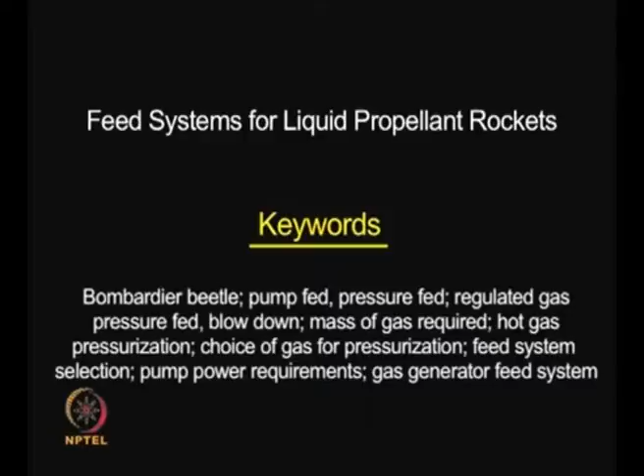Good morning. I think today we will start with this new chapter on liquid propellant rockets.

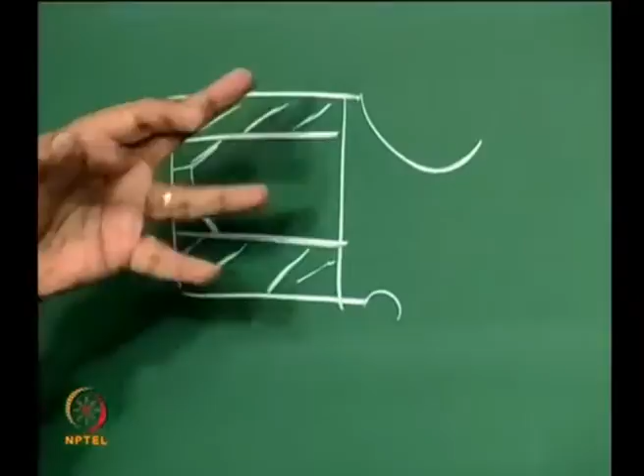When we discuss solid propellant rockets, we told ourselves you have a solid propellant which burns, you have a flame near the surface, and once a solid propellant rocket begins to burn, it is impossible to extinguish it. This is because you have the grain in a case, and once you ignite the grain, there is no way you can quench it, it continues to burn. Of course, there are some works done to see under what conditions you can stop the burning, and by rapid depressurization you can quench it, but these have not reached the stage of application. Therefore, a solid propellant rocket, once it gets started, you cannot control it, it burns and burns, that is about it.

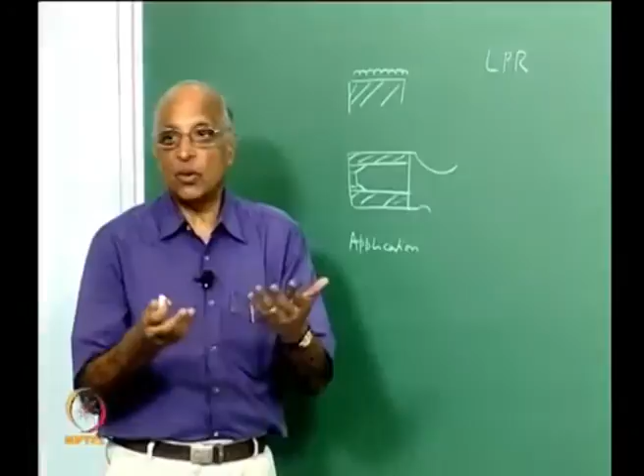Whereas when we talk of a liquid propellant rocket, we have considered different propellants. After all, I inject a propellant into it, I can always control it, and therefore there are certain advantages which a liquid propellant rocket will have.

Let us examine these things, but to get started with liquid propellant rockets, I thought let us go ahead and look at nature. When we considered the theory of rocket propulsion, we talked of a small insect known as the bombardier beetle, you will recall.

What did we tell ourselves at that time? This particular insect is somewhat small, maybe a centimeter to 2 centimeters or so, and it is somewhat heavy, and we find it all the time at all places. It is sort of unwieldy, it cannot fly that rapidly, and therefore it is always attacked by insects, and also it is harmless, it does not bite, it cannot fly much, we just pick it up on a piece of paper and throw it out whenever it comes.

This particular bombardier beetle has had some articles come out on it in the last 10 to 15 years, and one such article came in the Proceedings of the US National Academy of Sciences in 1997, volume 94, running over 5 pages from 1692 to 1697. The beauty of this is we must be familiar with what happens around us.

This bombardier beetle is attacked by ants, and what does an ant do? It stings us, right? And why do you feel a sting? It injects some formic acid into our system. Formic acid is something like carboxylic acid, and that is why you feel a sting, the same sting as when a bee stings us, because something is injected into us. In fact, the ant in Latin is known as formica because it bites us and injects formic acid into us, and this same ant also pesters this beetle by stinging it.

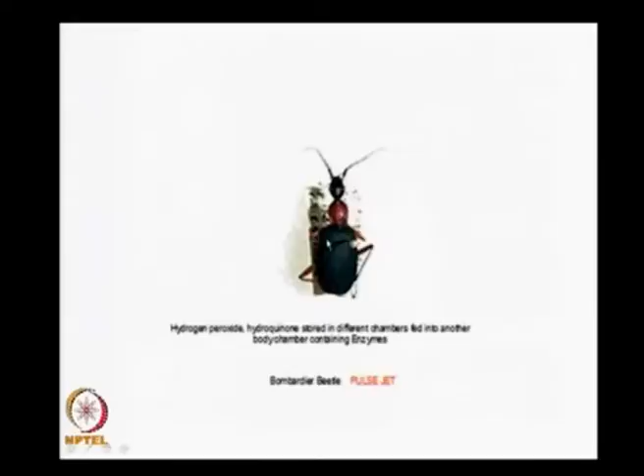It is a very unique way of evolution of species. All the species, if you look at Darwin's theory and all that, have come through some hierarchy, but this particular insect seems to be different from the other species, and it is very illustrative of something which I will now tell you. Let us go ahead and see what really happens: in one stomach you create H2O2, hydrogen peroxide, and in the other chamber you create hydroquinone, which is a fuel.

When it wants to squirt hot gases out, it pushes this hydroquinone, this hydrogen peroxide, into this third chamber which is coated with enzyme, and it chemically reacts to form hot gases which it squirts out.

In the experiments at the National Academy of Sciences, Eisner and others have been doing a number of experiments. They take something like a fork and place it mimicking the ant, and immediately it squirts out the hot gases. They put this intrusion over here mimicking the ant, and it pushes the gas, so it is able to squirt the hot gases in different directions. You put this over here and it squirts out the hot gases in this direction, and so on.

I was reminded of Leonardo da Vinci, the painter who lived in the late 15th century, and he made everything. He looked at birds flying, tried to construct an aeroplane, made bridges. Of course he was a famous painter - you remember the Mona Lisa painting - and in all his life, I think we should remember this: he opened his eyes to the natural world, and he never stopped thinking about why things happened the way they did. So also, maybe if we had seen this insect long back, we would have thought of something like an oxidizer, maybe a fuel injected into a chamber.

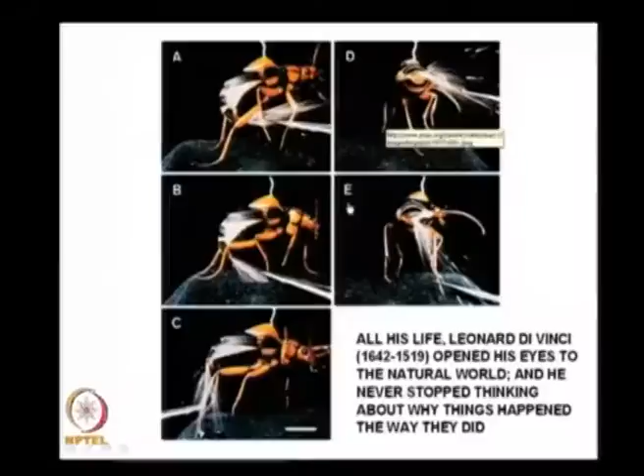Let us go back - this is again about squirting, this beetle. This is the prong or something like this. You are making it squirt out in this direction, maybe making it squirt out the hot gases in this direction, and so on. If you look at what this beetle does: a chamber containing oxidizer, a chamber containing fuel, and a third chamber in which it reacts and forms hot gases and squirts it out.

Well, a liquid propellant rocket consists just of fuel in a tank, an oxidizer in a tank. You pump the fuel and the oxidizer into a chamber - you pump it at high velocities through an injector, break it up into fine droplets, vaporize it, which is all happening in the third chamber, and then you have combustion taking place and you expand through the nozzle. This injector, combustion chamber and nozzle is what creates thrust. It is also known as the thrust chamber, and therefore a liquid propellant rocket consisting of all these gadgets is nothing very much different from the bombardier beetle which is there in nature.

And therefore, I think we should learn to look at nature and understand more about it. Now we come to a large rocket. What does the large rocket consist of? This consists of N2O4 as the oxidizer, and UDMH as the fuel. What is done is, you squirt it out from the tank through a pump, you force the N2O4 into the chamber, you force the UDMH into the chamber, make it burn over here, expand it through the nozzle, and this is what a liquid propellant rocket consists of.

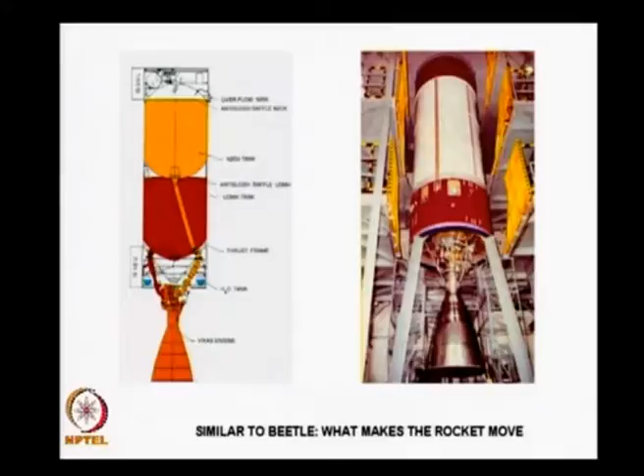The same engine I show here in a slightly larger one in which I carry more propellant. I have the oxidizer over here, I have the fuel over here, I have the pump over here, pushed it, and it generates thrust through the particular nozzle. Let us take one more example: in this particular rocket I just showed you, the oxidizer was N2O4 and the fuel was UDMH.

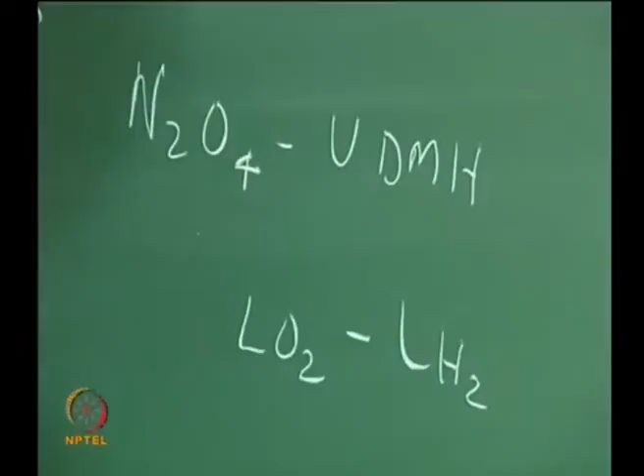We also talked in terms of fuel being liquid hydrogen, the oxidizer being liquid oxygen. When I carry propellants like liquid oxygen and liquid hydrogen, liquid hydrogen is not very dense, so I need a huge tank. I have liquid hydrogen here, liquid oxygen here, and a pump that pushes it into the combustion chamber where it burns. This is what a cryogenic liquid propellant rocket is like.

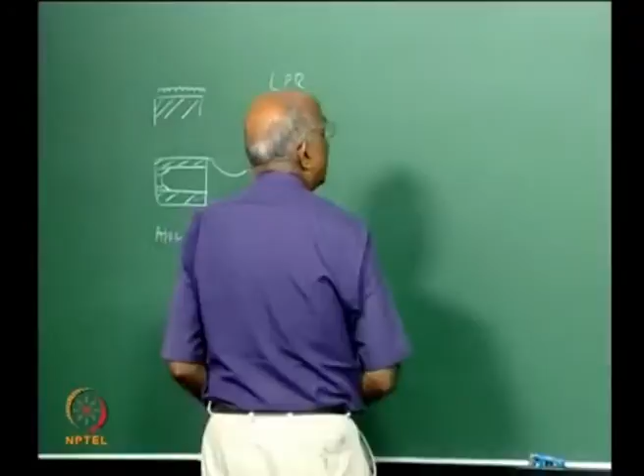What do we infer from these few examples? In case of a liquid propellant rocket, all we need is something like a fuel tank, maybe an oxidizer tank, maybe a pump to take a small value of pressure and increase it - this tells me high pressure, this tells me low pressure, with the incoming pressure small and the outgoing pressure much larger. I push it into a chamber, and I cannot just push it, I have to break it up into particulates.

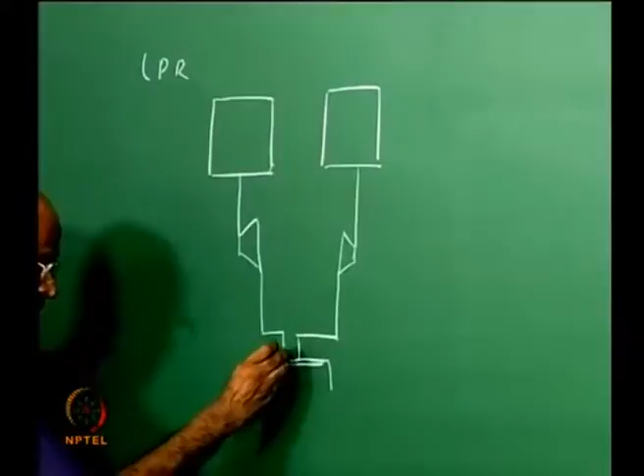That means I have something like an injector which allows the required quantity of propellants to come in, breaks it into droplets, and I have a chamber wherein the reaction takes place, and then this huge nozzle wherein I expand the gases. This becomes the liquid propellant rocket.

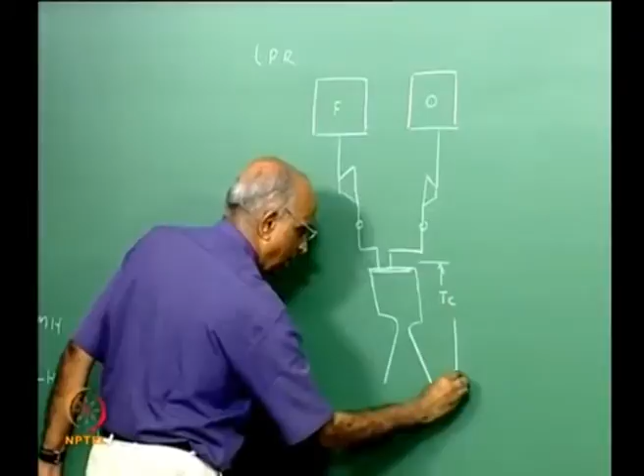Maybe I have to put some valves here to start the combustion and stop it whenever I want. Let's say the liquid fuel is over here, the oxidizer over here, and here you have the thrust chamber, wherein high pressure gases are formed and thrust begins to build up.

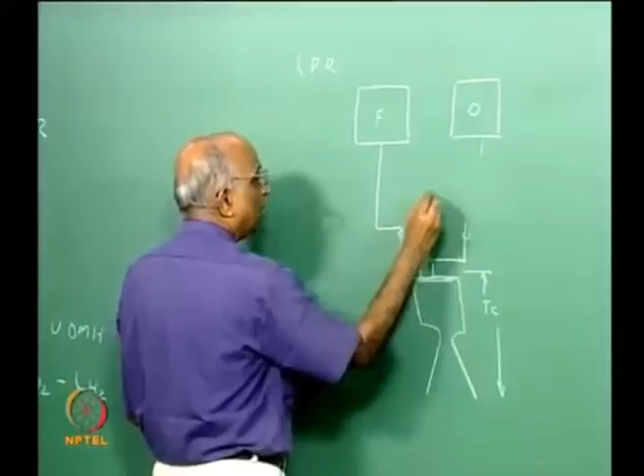Now you will immediately ask me: why do I have to have pumps in the first place? After all, I have to supply the fuel - why not supply it directly, removing the pumps? Like when we do an experiment using diesel combustion in an IC engine, I just have an overhead tank on the wall, a diesel tank, and directly connect it to the IC engine for the experiment.

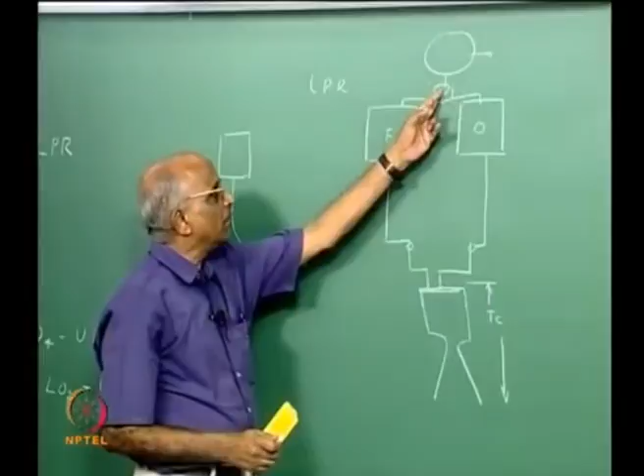Why not directly connect the fuel and oxidizer, and to push it through, maybe have a gas bottle containing high pressure gases, with a pressure regulator over here to reduce the pressure, a reduction mechanism to supply the gases at low pressure. In other words, I put a pressure regulator with a high pressure source of gas. Why high pressure? Because I can have a smaller gas bottle, and I pressurize the fuel.

At high pressure I can send it into the chamber. Therefore, I need not always have a pump, but to understand whether pumps are really required, I need to do a little more exercise on this. Let's see what is required.

Let me again replot this. I tell myself I have something like a gas bottle which stores gas at high pressure, and a pressure regulator downstream. What does the pressure regulator do? From high pressure I can store gas at maybe 30 MPa, 300 to 400 bars, but I do not want such high pressure, so I want much lower pressure, maybe 10 MPa or 1 MPa. So I put a pressure regulator which senses and reduces the pressure through a particular opening.

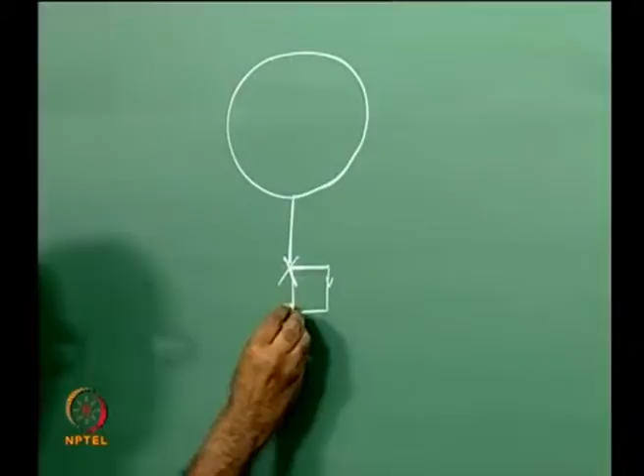It is a feedback control, so as it is controlling, it is also connected over here, and then I connect this gas to the fuel tank and to the oxidizer tank, which are full of propellants, and then I bring it into the combustion chamber over here.

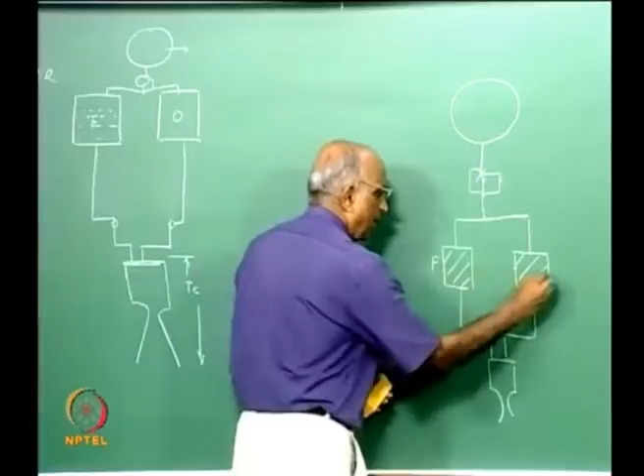What am I talking of? I am talking of having a high pressure gas bottle. I regulate the pressure to a lower value and push the fuel and oxidizer into the combustion chamber. This becomes something like using a cold, high pressure gas, and I call this a regulated gas pressure fed system.

That means, after all, I started with a pump. Let us see under what conditions I would really require a pump, and under what conditions I can use a regulated pressure system instead. It is not always necessary to have a gas bottle and all that.

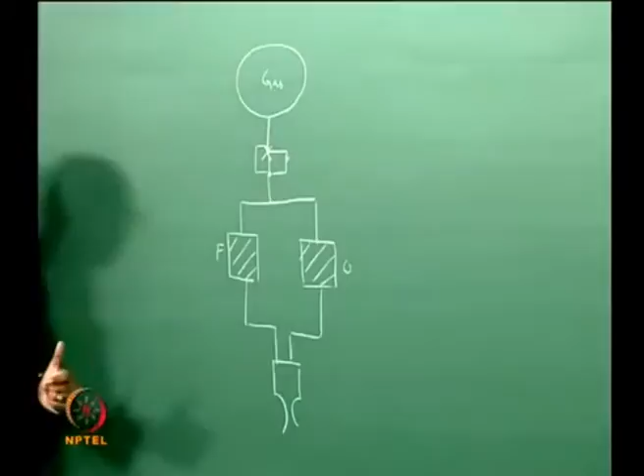I can think in terms of a different configuration wherein I take a tank, maybe a fuel tank, maybe an oxidizer tank. I don't fill the propellants fully in the tank. Let us say this is the fuel tank with liquid fuel, and I fill it with liquid oxidizer, then directly bring it and supply it to the chamber.

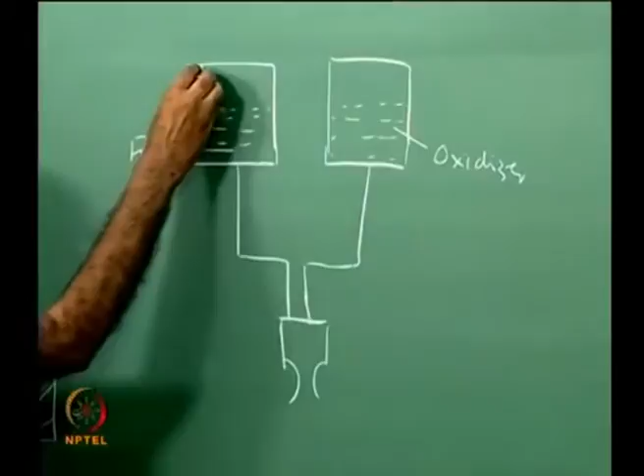But how do I push it? I fill gas at maybe high pressure over here, and then I put a valve. I open this valve and immediately propellant flows. When I want to stop it, I close this valve. So the gas is contained in the tank itself and it blows the propellant into it. This is known as a blow down system.

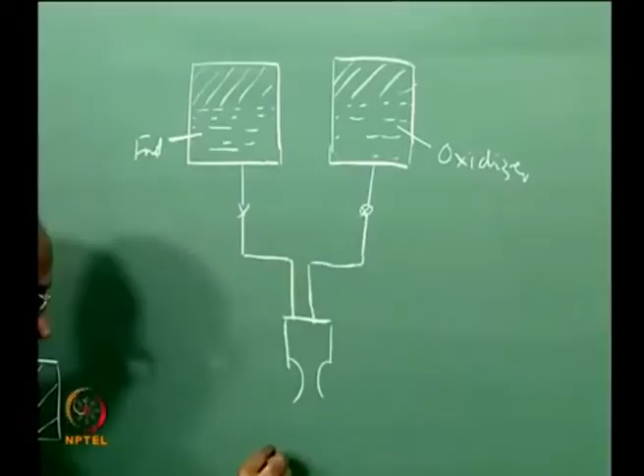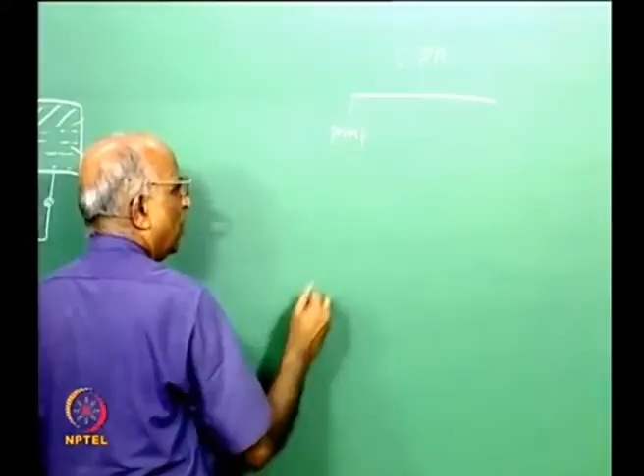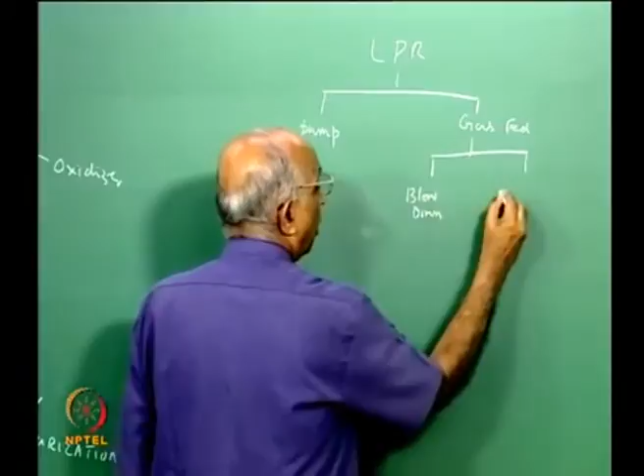So what have I been talking of? In the case of liquid propellant rockets, we need to supply the propellants. We looked at the pump and told ourselves a pump may be required, but also a cold gas at high pressure is possible. This gas can be directly filled, and when it blows down, the pressure keeps decreasing and therefore the thrust keeps decreasing. Whereas if I give a regulated gas, I maintain constant pressure and therefore get constant thrust. So the high pressure gas fed system could either be in a blow down mode or in a regulated mode.

But we can't rule out that this is not required. For instance, if you have a satellite sitting in space, let us say inside a spacecraft, I will show you a small model I have of this satellite. Let us say you have the satellite, like INSAT, which is something like a box structure. It consists of a box, and you have solar sails, and when light falls on the solar sails, it creates pressure.

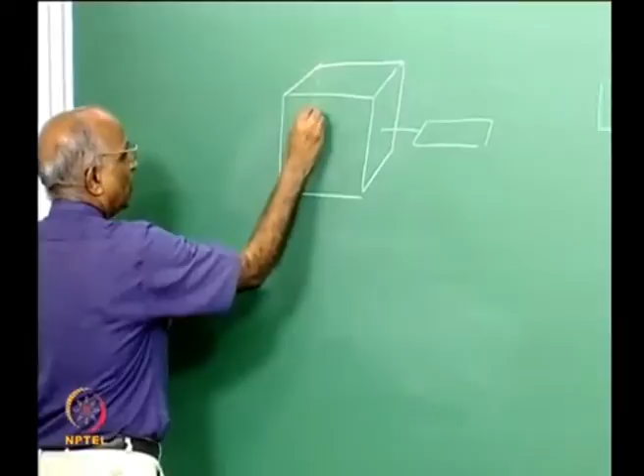We will study this method of propulsion towards the end of our classes. You have to balance the pressure from the sunlight falling on this. You put something like a balance such that it does not get tilted. To control the attitude, we put small rockets on the different faces. How do you supply propellant to this? Inside this structure, I put a propellant tank, a fuel tank.

At the bottom of this fuel tank, I have an oxidizer tank, maybe with a common bulkhead, meaning a single connection. This could be fuel, this could be oxidizer. I could put gas pressure here and connect it through lines to this rocket, this rocket, and so on. Whenever I want this rocket, I open this valve and it fires.

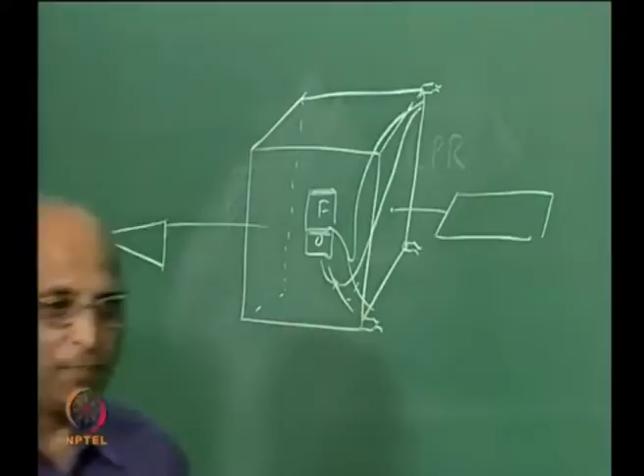This is the model I brought of this particular blow down mode, and this is how the INSAT spacecraft looks. You have the central box, and inside it there is a chamber with the fuel tank and oxidizer tank. These red knobs shown correspond to the thrusters, the liquid propellant rockets.

Whenever you want the rocket to fire, you just open the valve. The tank is already pressurized, so the liquid fuel and liquid oxidizer flow into these thrusters and generate thrust, and that is how you control it. This is how liquid propellant rockets are used in spacecraft also. But there is a problem.

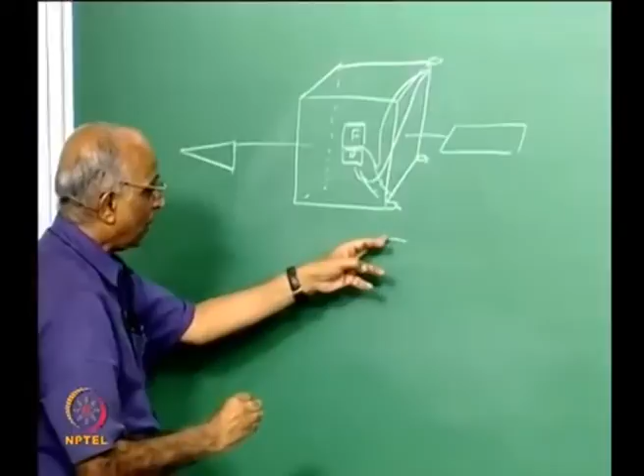Whenever I have fuel and oxidizer and a spacecraft revolving at a constant velocity, in this frame of reference it has a centrifugal force balanced by gravity. Therefore there is no weight for this and it creates new problems. We have to see under weightlessness how do we supply the propellant.

This also requires supplying fuel and oxidizer when they are in a state of weightlessness. If I put a propellant in a tank, it may sit on top and not come to the bottom, and when I pressurize it with gas, the gas may come out but the liquid may not. Supplying propellants in weightlessness is going to be a problem.

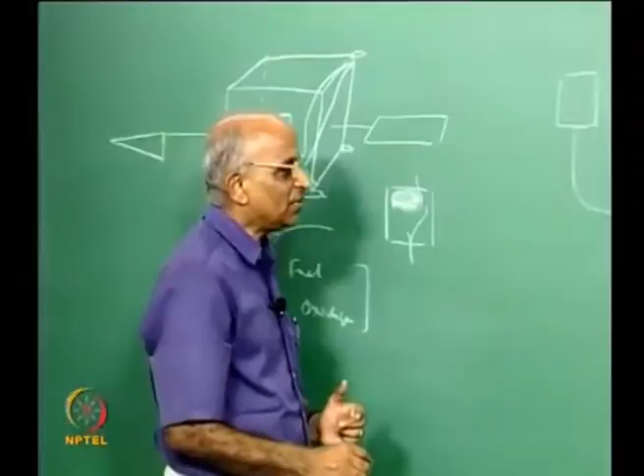Maybe we will take a look at it later, but right now let us look at what constitutes a gas fed system, which could be either blow down mode or regulated mode, and then come back to the pump. Let us see if anything else is there in between these two.

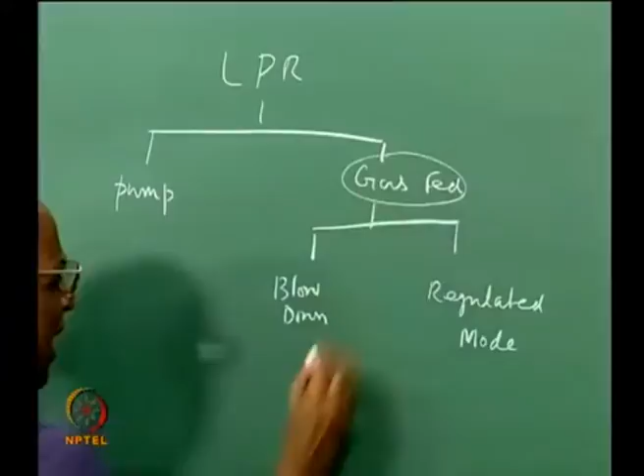To be able to do this, let us first try to find out how much gas, how much high pressure gas is required.

First we have to supply the propellants. Once I give the thrust, I know what must be the mass flow rate of propellants. How do I calculate that? Let us refresh ourselves again.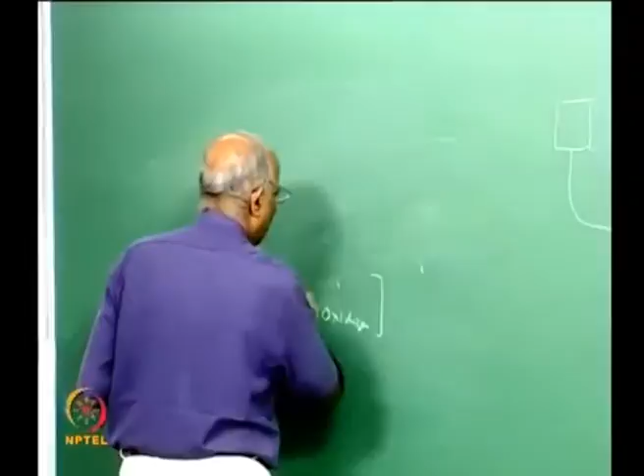Suppose the thrust of the rocket, as an example, is 6 kilonewton, and let the specific impulse of the rocket be equal to 3000 Newton second per kg. Then the mass flow rate of total propellants, fuel and oxidizer, equals 6000 Newton divided by 3000, which is equal to something like 2 kg per second.

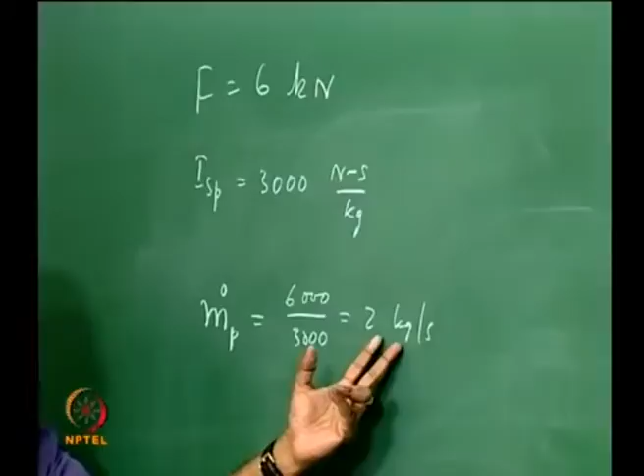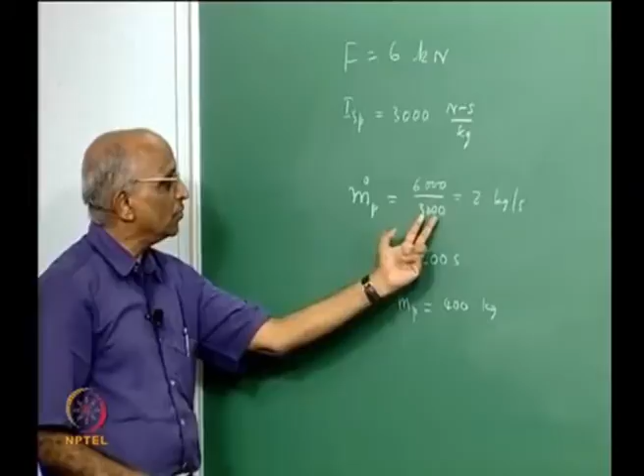To supply this 2 kg per second, suppose the rocket has to fire for a small time, let us say 200 seconds. Then I need to supply a total mass of something like 400 kg during those 200 seconds. We had 6 kilonewton, which is 6000 Newton, divided by 3000 Newton second per kg, giving 2 kg per second. This is the total mass of propellant which has to be exhausted.

I want to know how much gas is required, how much mass of gas. Do I require 1 kg, do I require 100 kg? Because if the gas requirement is large, the rocket cannot take off. Let us try to estimate it. And how do we estimate it?

We again follow the same figure, but now let us simplify it. Let us say I have gas pressure, and we also told ourselves that gas can be stored at fairly high pressures. Let us plot it out. I have a gas bottle. It contains, let us say, M0 kilograms of air or gas, whatever is required.

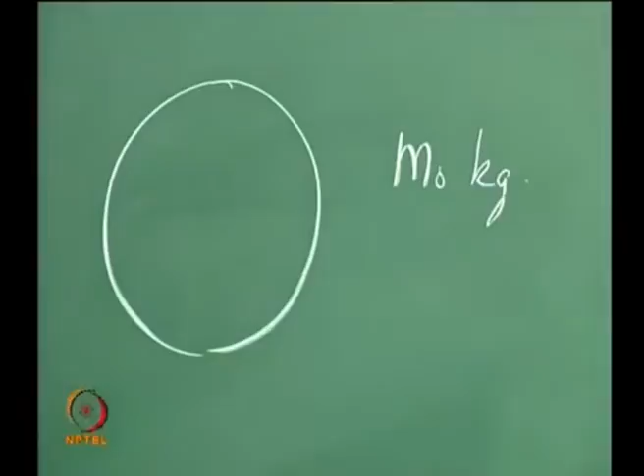I must also find out which gas will do my job well. Let us say it is at a high pressure P0 and at room temperature T0, because I do not want to say at this point whether I need a hot gas or a cold gas. Maybe when I derive the expression, it will become clear what type of gas is required and what must be its temperature.

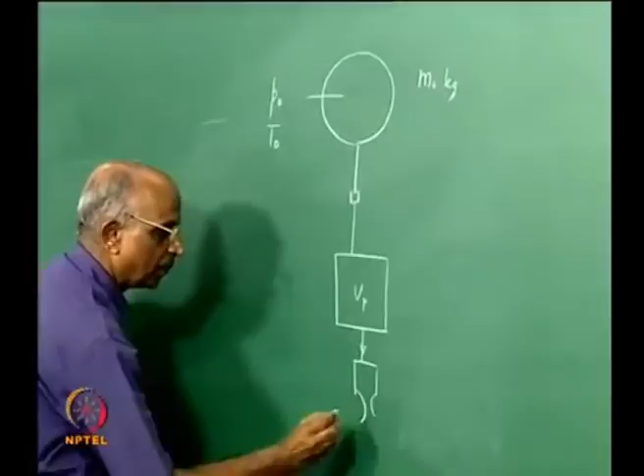From this high pressure source, I put a pressure regulator and reduce the pressure from the value of P0, and it must communicate with the two tanks put together. Let the total volume of propellant be Vp, which must be supplied to the thrust chamber. Let the pressure at which I would like to supply, at this surface, be Pp, in Newton per meter square or Pascal, and I reduce the pressure from P0 to Pp in this type of regulator.

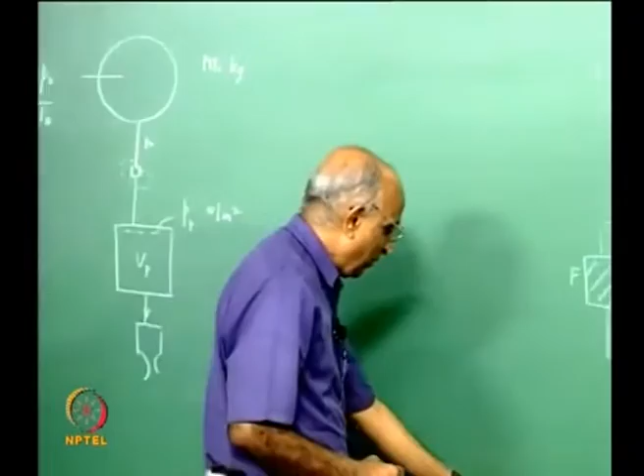I reduce the pressure from P0 to the value Pp. Now my point is, how do I find out the value of M0 kg? I think it is a straightforward thermodynamic problem, but before doing this problem, it is also required for us to put some other things down.

Let us do a general problem. Let us say at this point in time, when I start the work, I have the quantity of propellant liquid available which is Vp. When I finish my exercise, the quantity of gas which is available is going to be...

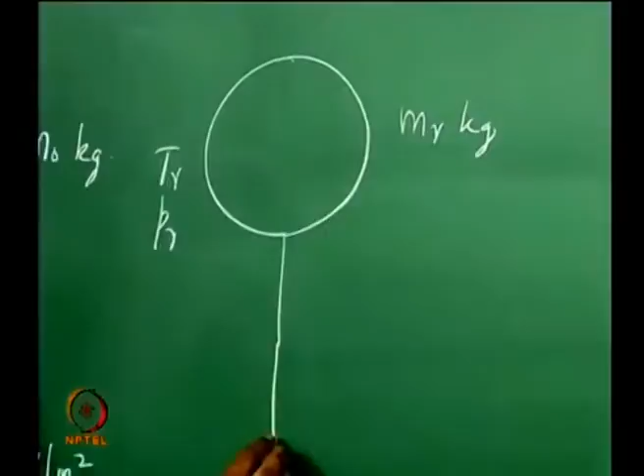I use some gas for pressurization, therefore at the end of operation, let us say Mr kg is left, and the temperature here is Tr, the pressure is Pr. Then at the end of it, again I have the same system, the same tank, all the propellants are expelled, it is now gas over here.

Since I am going through the regulator, and I have reduced the pressure to Pp, when the propellant has just got out, it will be filled with gas at pressure Pp, and the temperature, since it is slow depletion or fast depletion, it reaches the temperature of the propellant, the temperature will be Tp. In other words, what is it?

This is my initial condition, let me make the figure complete. What is it I am telling? I have exhausted or pushed out a volume of propellant Vp, and now I am left with the gas expanded, occupying this volume in addition to this volume, and this is my final condition.

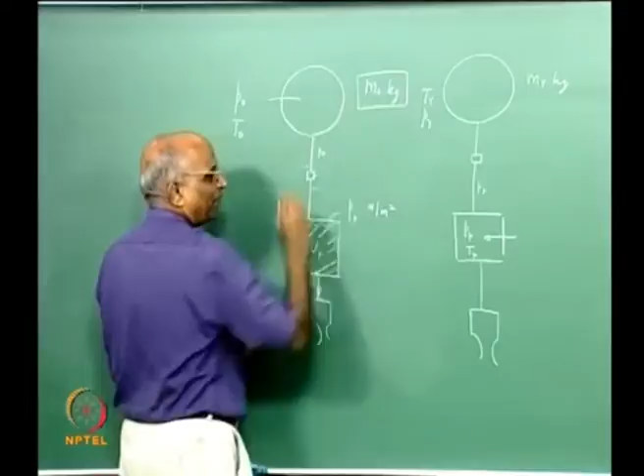I want to write an equation and determine the value of m0 kg which is required. How do I do this problem? Maybe we have done such problems in our thermodynamics subjects earlier. Let's just try to write an equation for it and try to determine the value of m0.

I want to ask you, what is this which is happening? Let us say the system does not have any heat transfer. Let us make an assumption that the tanks are fairly insulated, the gas bottle is insulated, there is no heat transfer taking place, and therefore I ask myself, what is the work done by the gas in pushing out a volume Vp of the propellants?

Let us calculate Vp for this particular problem. If I take the density of the propellant to be same as water, density is equal to 1000 kg per meter cube, that is the density of water, 1 gram per cc, and therefore the volume Vp is going to be 400 divided by 1000 meter cube, which is equal to 0.4 meter cube. In other words, for this rocket, maybe I have to get rid of 0.4 meter cube at a given value of pressure.

Now, before I complete that problem, let's try to generate an expression and see what is the value. We tell ourselves, supposing I have a system like this. This is my initial state of my gas. The final state of my system is this, in which the gas has come from here and moved over here.

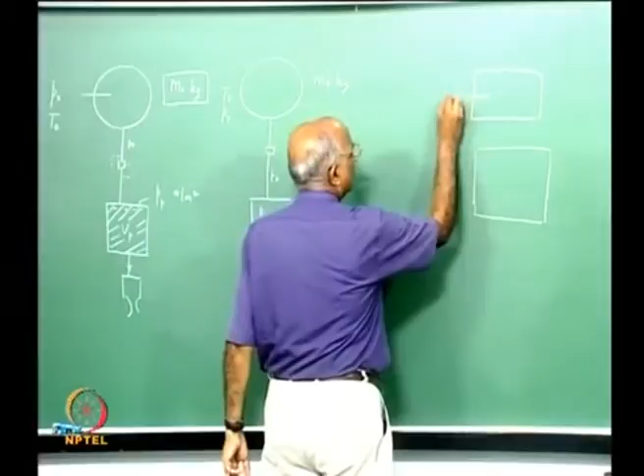I tell myself Q is adiabatic, well Q is there, the system does some work at the boundaries, then I can write Q minus W is equal to the change in internal energy, for a system. Something is getting in, some work is being done, and the change is in the internal energy.

Therefore, now I need to say, well, I take an adiabatic system, Q is 0, I need to find out the value of W, and I need to find out the value of change in internal energy. Let us write the expressions for these two.

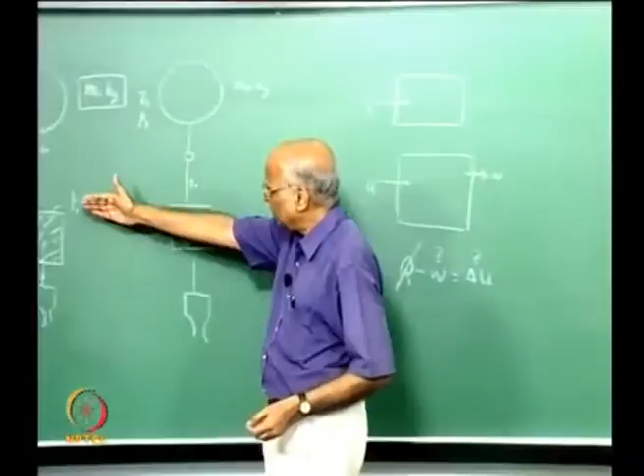The work done by the gas is in expelling the liquids, and therefore what is the value of work? Can we say? Well, I have a constant pressure which is applied, the displacement is Vp, the work done is equal to Pp, the pressure, into volume of the liquid. Is it okay? What is the change in internal energy, final minus initial?

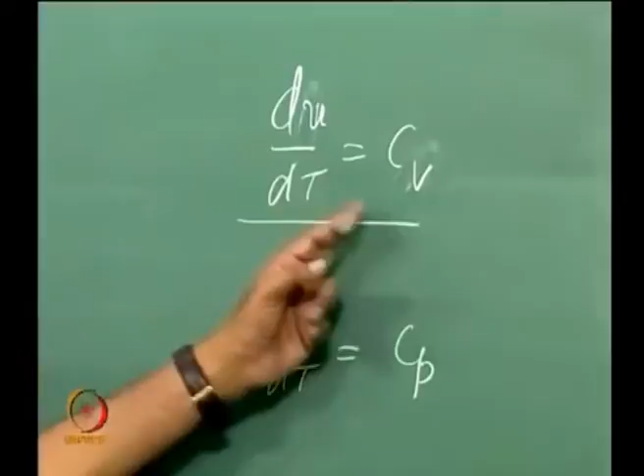Well, finally I am left with Mr of the gas. We know that du by dt, let us put it down, is equal to Cv, where U is the specific internal energy, and dH by dt is equal to Cp. Well, we are talking of internal energy, therefore U is equal to Cv*T.

Therefore du is equal to the final gas Mr, which is available, into Cv into Tr. This is the final mass which is available. We say it is at a reduced pressure and a reduced temperature because it has expanded. Some gas comes in, plus I have gas which is there Mp into Cv into T, this is the final value of internal energy.

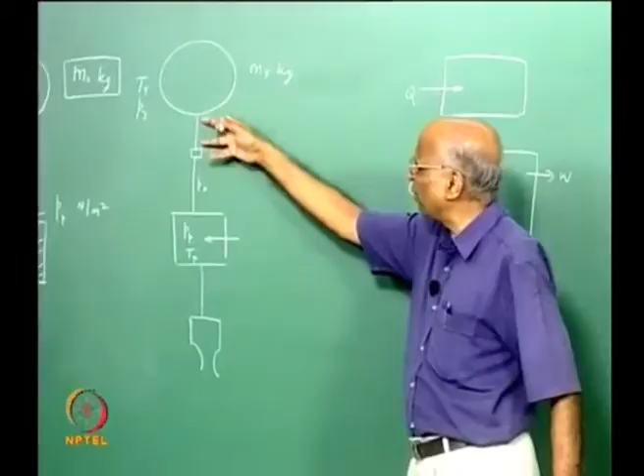I say that this volume of the lines over here or plumbing lines are much smaller than this and this, therefore I neglect it. And what is the value of the initial internal energy? Minus... yes, you could tell me.

What will be the initial value? Yes, m0 into Cv into initial temperature. I need to solve this equation and find out this value after knowing that minus W is equal to delta U. Let's find that value.

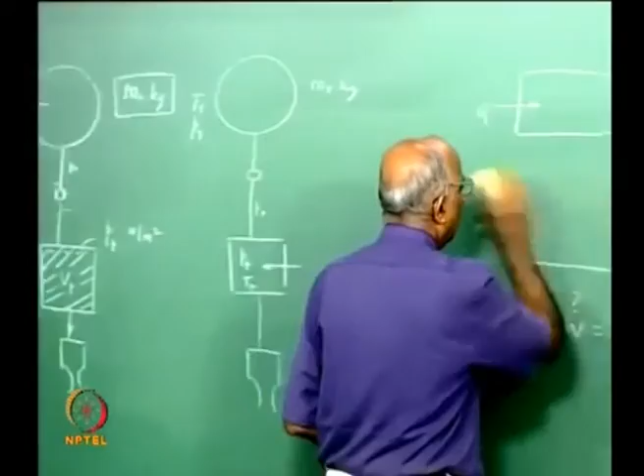Maybe I use this part of the board. What I have: Mr into Cv into TR, plus Mp into Cv into Tp, temperature of the final propellants should have been Tp over here, minus M0 Cv into T0 is equal to minus W minus Pp into Vp over here.

Is it all right? Q minus W is equal to the change in internal energy. I want to solve this. To be able to solve this, let us see what Cv is.

We know Cp minus Cv is equal to R, and therefore Cv into gamma minus 1 is equal to R, or rather we have Cv is equal to specific gas constant divided by gamma minus 1, where R is the specific gas constant, has units of joule per kilogram Kelvin. And Cv therefore has units of again joule per kilogram Kelvin.

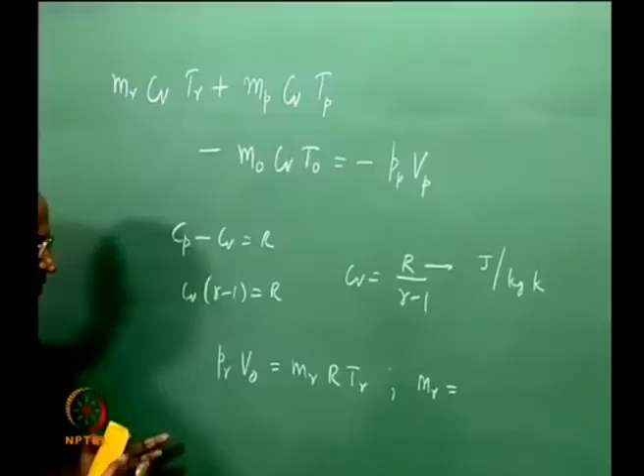Now, what is the value of Mr from the gas equation? We have PR into V0, that is the volume of the tank, is equal to Mr into R into TR, or rather I can write the value of the mass, final mass after expansion has taken place in the tank, and the mass of gas in the tank is equal to PR into V0 divided by RTR.

Is it all right? Similarly, I can write an expression for Mp, and what will Mp come out to be? Mp should be equal to Pp into Vp divided by R into Tp over here.

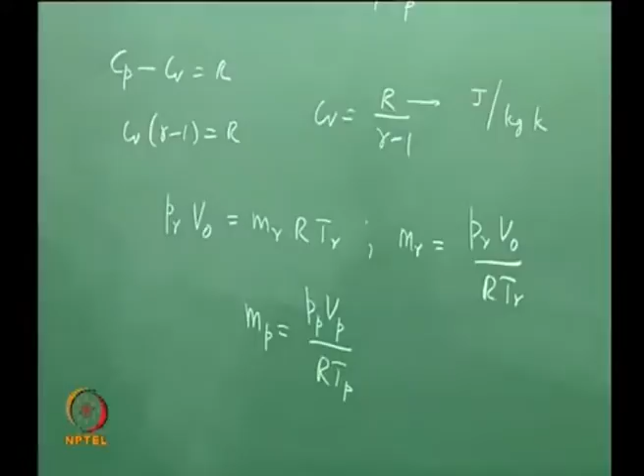I need to find the value of M0, therefore let us not touch this. Therefore let us substitute these two values of Mr, Mp and the value of Cv in this expression and try to get the value of M0 coming out.

Let us say Mr is equal to PR into V0 divided by RTR, and Cv was equal to R divided by gamma minus 1, into TR, plus similarly I get Pp Vp by RTp into R, again I get the value of Tp divided by gamma minus 1, minus I get the value of M0 into R divided by gamma minus 1 into the value of T0 over here, this is equal to minus Pp into Vp over here.

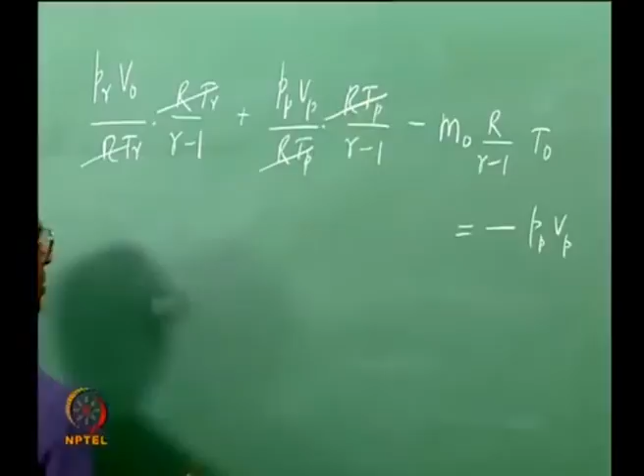Is it all right? Now I find that RTR cancels, RTP cancels, and now if I were to simplify, I do not know the value of volume because volume is related to mass.

I can write P0 V0, that is the initial condition of gas before starting over here, is equal to M0 into RT0, or rather I can write the value of V0 as equal to M0 into R T0 by P0.

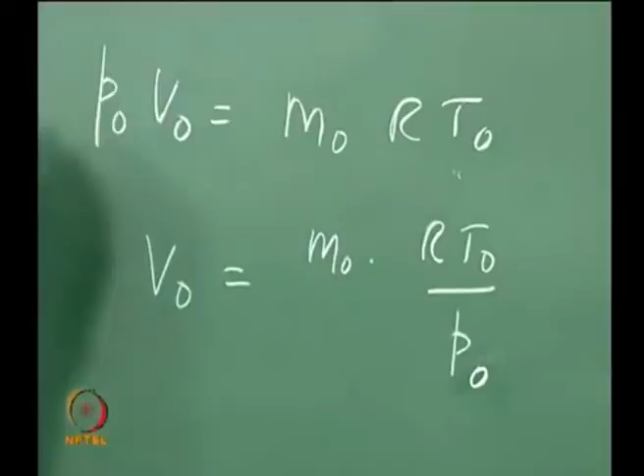I substitute this expression after volume is equal to mass into RT divided by P over here, I substitute it over here, take gamma minus 1 on the right hand side, because all the 3 have gamma minus 1, and therefore I get m0 into RT0 into PR by P0 is the value this reduces to, plus I have Pp into Vp over here.

Minus I get m0 into RT0 divided by gamma minus 1 is equal to minus Pp, I am sorry I should not have put that, because I am going to remove gamma minus 1 here, minus Pp Vp divided by gamma minus 1.

This right hand side now reduces to minus gamma Pp Vp minus Pp into Vp plus, because minus and minus becomes plus. Therefore, immediately this and this gets struck off, and now we are able to get an expression for m0.

Let us put it over here. Let us collect the similar terms. I get RT0, which will come at the denominator. I have in the numerator the value gamma on the right hand side.

Therefore, what is it? Gamma Pp Vp into 1 minus the value of PR by P0. Please check this. How did we come to this?

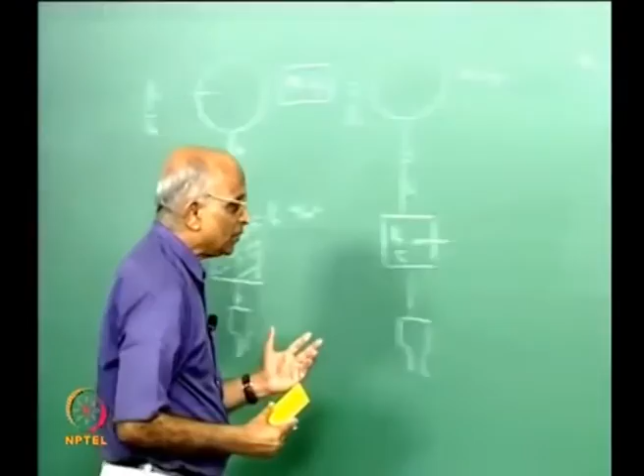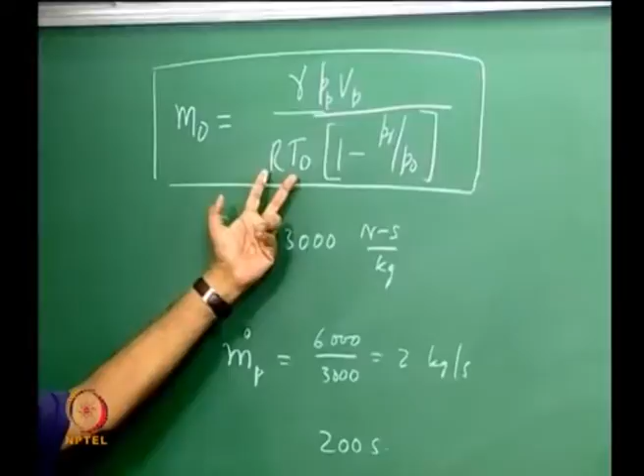Now, I want to examine how much is this gas, what is this expression. Whenever we derive an expression, we must take a look and see under what conditions this holds good. Let's do that, I don't need this anymore.

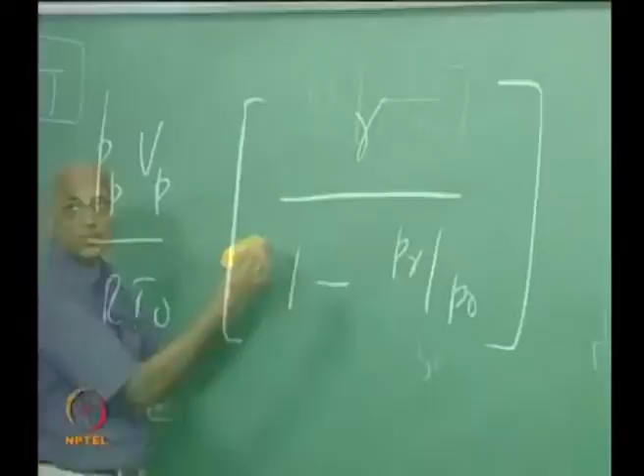Had the process been isothermal, what would be the gas I require? M0 would equal Pp Vp by RT0, because it is isothermal. So when gas is expanding, and that also irreversibly, under isothermal expansion I'd have Pp Vp by RT0, and due to the expansion process I have an amplification factor, 1 minus PR by P0. I'm writing the same thing, Pp Vp by RT0, because M equals PV by RT0 isothermal, and then this is the multiplication factor.

Now I want to find out, for this engine which we said is 6 kilonewton, the mass of the gas which is required. Let us do one example, and then we can extend it for different pressures and different thrust. Let's say in this case the volume equals 0.4 meter cube.

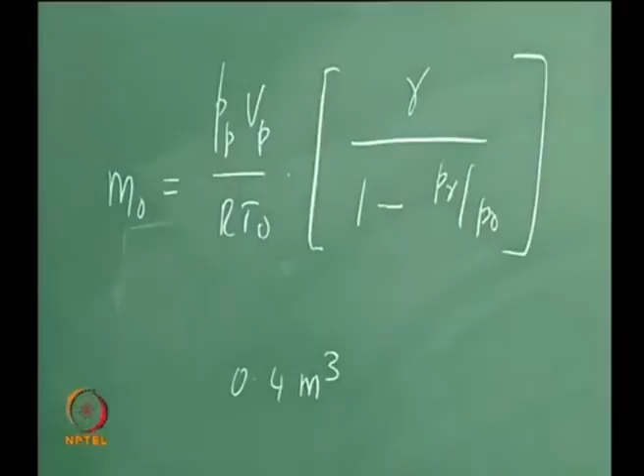Now how much gas do I require? Will this expression also tell me what type of gas I require? Do I require a light gas or a heavy gas? What does this expression tell me? Can we all infer something from this? Should I pressurize the initial volume with a high molecular mass gas, a low molecular mass gas, or at a high temperature, or under what conditions should I do this?

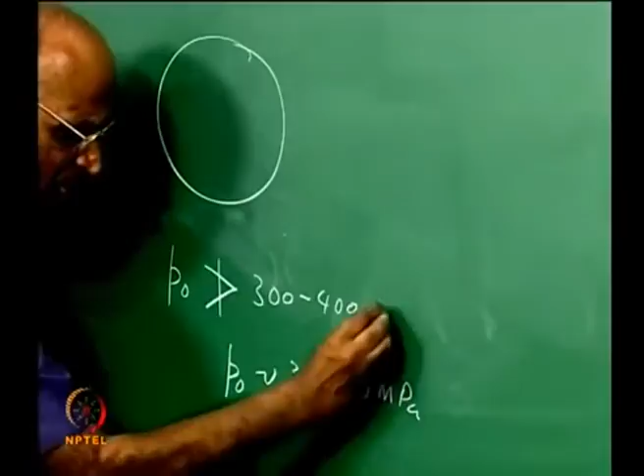All I can tell you is the value of P0 is limited, because I need a gas bottle which can hold a certain pressure, and that pressure cannot be greater than around 300 to 400 bar, because beyond that, making something hold such high pressure gas is difficult. Therefore, normally the P0 is around 30 to 40 MPa. This is bar, right?

Now, all that I know is P0. How can I choose the other parameters like gamma, R and all that? Does it tell me what type of gas is required? Let's do one more exercise. Let's say R equals the universal gas constant divided by the molecular mass, 8.314 divided by the molecular mass. If the molecular mass of the gas is smaller, I get a very large value of R. If I get a large value of R, I can have a smaller mass of the gas.

Therefore, this immediately tells me the lighter the gas, the better. Hydrogen is the lightest, whereas helium has a molecular mass of 4 grams per mole. Therefore, invariably I would like to choose helium, which is a light gas, for my purpose. See, the expression is able to tell us what we are looking for.

This is one point. Second is, helium has a large value of gamma, 1.67 compared to air's 1.4, but whereas R could be something like 4 to 28, 7 times larger. Therefore this is not that important, this is more important, and therefore I choose a light gas for pressurization.

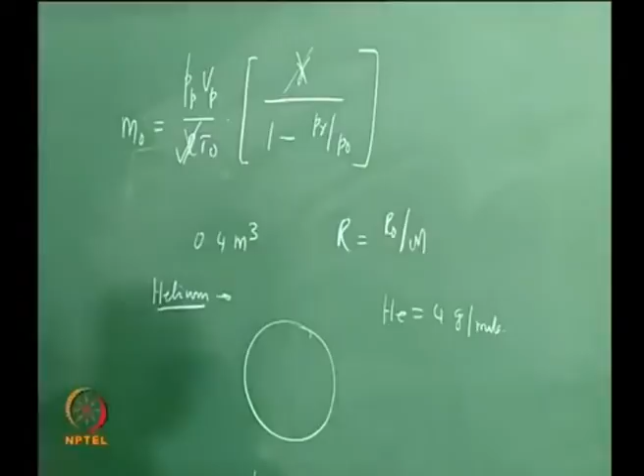But this expression also tells me a higher temperature is suited, because higher temperature means I have a smaller value of mass of the gas. Therefore, rather than choosing a cold gas, we initially said I have a gas which is cold for pressurization - why not use a hot gas? Why not have some reactions taking place in the combustion chamber and do this? And therefore this is also an option.

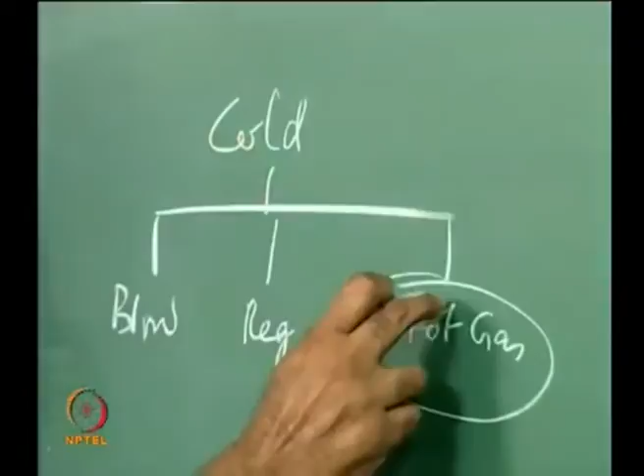Therefore, in addition to cold gas, I could have blow down mode, I could have regulated mode. It's also possible for me to have hot gas, and hot gas is more efficient. But in practice it has been difficult. Several countries have tried it, but it has not yet found an application. But I think we should keep this in mind. I think in future this will be a strong contender for a gas pressurized system.

Having said that, let us do a small numerical problem to see what is the amount of gas. We should have some feel for whether I need 1 kilogram or a few grams. Let's say for this rocket, requiring a Vp of 0.4 meter cube, the chamber pressure is small, let's say 1 megapascal. If the chamber pressure is 1 megapascal, I have to force propellant into it - let's say Pp equals 1.2 MPa.

Therefore, I say yes, the final pressure, the lowest PR, is equal to the supply pressure. The volume is known, R for the gas helium is equal to 8.314 divided by 0.004, so much joules per kilogram Kelvin. This is known, and I can calculate the value of mass. And this value of mass for this particular thrust, when the supply pressure is 1.2 MPa, works out to be something like 1.34 kg.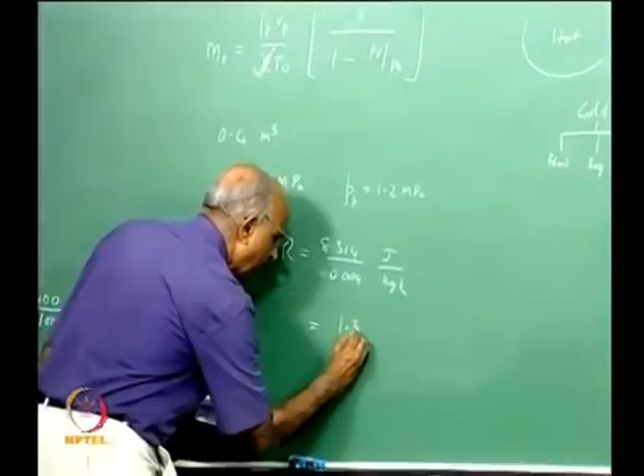Now I want to slightly change it. I have the same rocket which is developing 6 kilonewton, but the chamber pressure, instead of being 10 bar or 1 megapascal, is now changed to 10 MPa, and the supply pressure therefore becomes, let us say, 12 MPa. Therefore the quantity of gas becomes directly 10 times, that is something like 13.4 kg. Now if I talk in terms of a thrust which is much larger, maybe 600 kilonewton, the quantity of gas will be very much larger, and therefore we will have much larger quantity of gas.

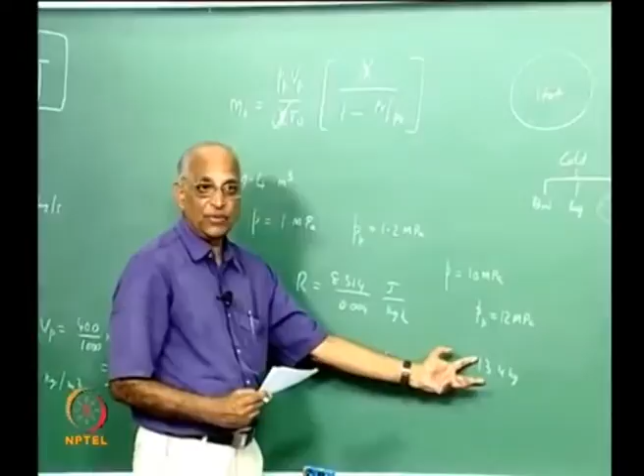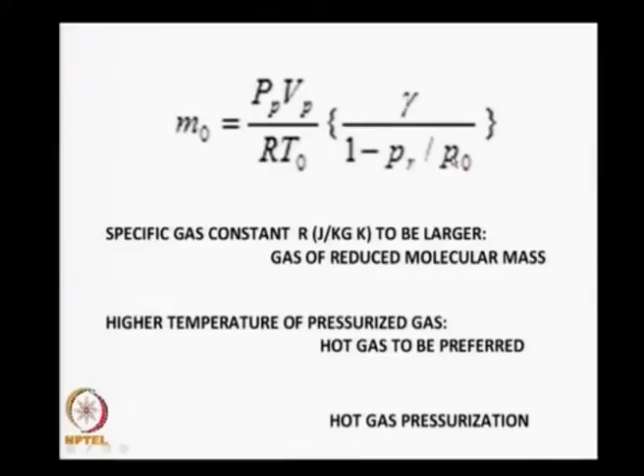Maybe you should try this as an example, but let me summarize it through slides. In the next series of slides, this is what we said as a regulated pressure system, and this is something like a blow down system, and we wanted to find the gas. We had the gas bottle, the regulator, oxidizer and fuel to supply, and we simplified it. This is the initial condition, this is the final condition, and then we went around and said m0, mass of the gas required, is equal to Pp Vp by RT0, gamma by 1 minus PR by P0. Then we found out that hot gas pressurization is an option, and now we calculate the value.

When I have a low pressure engine of thrust 6 kilonewton, the chamber pressure is 1 MPa, the supply pressure is 1.2, the mass of gas required is 1.34 kg. When the same 6 kilonewton is operated at a high pressure of 10 MPa, the supply pressure is 12 MPa, the mass of gas becomes, instead of 1.34, I should have written 21.4 — maybe somewhere this factor I had removed, therefore it is not 13.4, but it is 21.34. Maybe you all should check it at home.

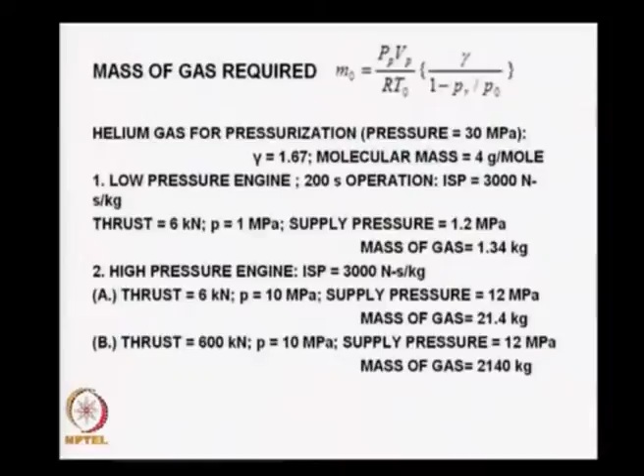You see when the chamber pressure increases by 10, the quantity of gas is increased by almost 20 times, whereas if I have a high thrust engine of 600 kilonewton, at the same pressure value the quantity of gas required is something like 2000 kg. Therefore it is not humanly possible to have such amounts of gas being carried in a rocket, and that is where it becomes necessary for us to have something like, let us go back, have something like a pump which can supply the propellants to it.

That is why the necessity of a pump. Now if you were to go back and compare the different systems, we talked of a blow down, a stored gas, and a hot gas system. We find when the thrust is small and the burning time is small, I can manage to have a blow down system, like what was used in our INSAT spacecraft, because I need very small thrust, I operate at low chamber pressure. When I want to operate at slightly larger time and larger thrust, maybe something like a regulated gas system is required. But if I want still better, maybe a hot gas system, but beyond some thrust and burning time, I need to operate in this region, which can only be done using a turbo pump or a pump system.

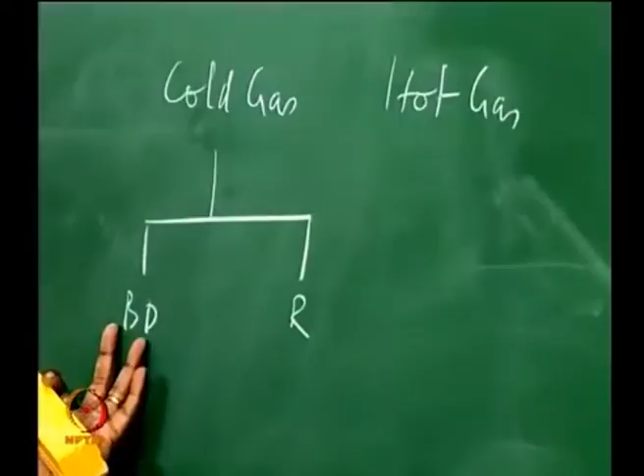Therefore, what is it we have been telling ourselves so far? We said the feed system could consist of different possibilities, and what we said is we could have cold gas pressurization — that means I have a gas bottle containing something like a cold gas. The cold gas could either be in a blow down mode or in a regulated mode, but if the rocket fires for a longer time and the thrust is large or the chamber pressure is large, I essentially need a pump to take the fuel from the tank into the chamber, and this is what we must remember. Therefore, maybe I need a pump system.

Now let us go back and calculate what is the power of the pump which we require in this case. Let us just do that small exercise using the same numbers what we had.

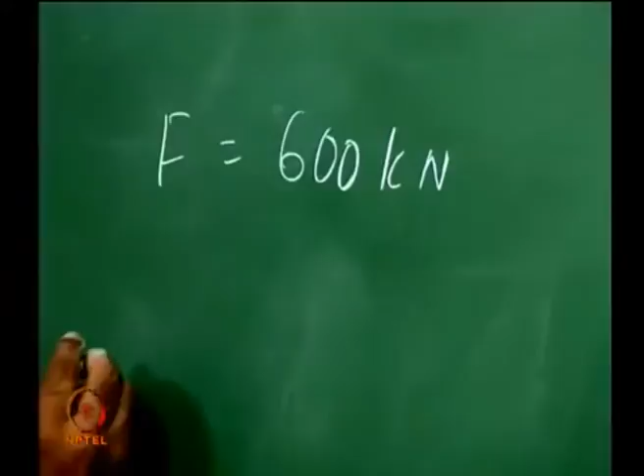Let us take this example. The thrust of the engine is equal to, let us say, 600 kilonewton. This is how that engine was I showed you, UDMH N2O4, has a thrust of around 600 kilonewton, and the specific impulse is equal to 3000 Newton second per kilogram. Therefore my mass flow rate of propellant is equal to something like 200 kg per second. Keep these numbers, let's have some familiarity with numbers, because we must be able to think in terms of numbers. 600,000 divided by 3000, it is equal to 2, therefore I have 200 kg per second.

Therefore, if I have to supply this, let us again take the density as same as the density of water. Therefore, the rate at which the volume has to go is something like 200 divided by 1000 meter cube per second, which is equal to 0.2 meter cube per second.

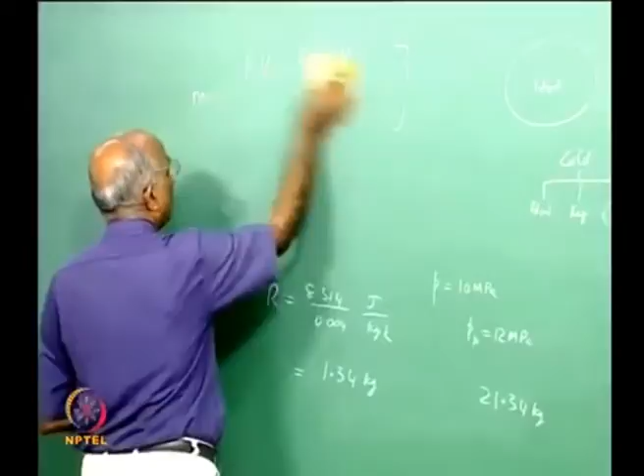What is the power required for a pump to supply 0.2 meter cube per second at a given pressure? Let us take the same value of pressure, let us say it has to supply at a pressure of 12 megapascal. Because the chamber pressure I am talking in terms of 100 bar, the chamber pressure is 10 MPa. What is the work to be done by the pump which is to supply flow rate of 0.2 meter cube per second at a pressure of 12 MPa?

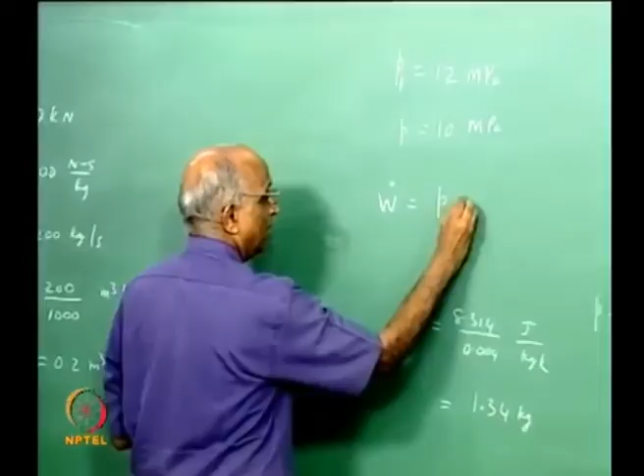If we know, the rate of work done is equal to Pp into Vp, and this comes out to be, let us calculate, 12 into 10 to the power 6 into Vp which is 0.2 meter cube, that is equal to 2.4 megajoule per second, which is equal to so much megawatts.

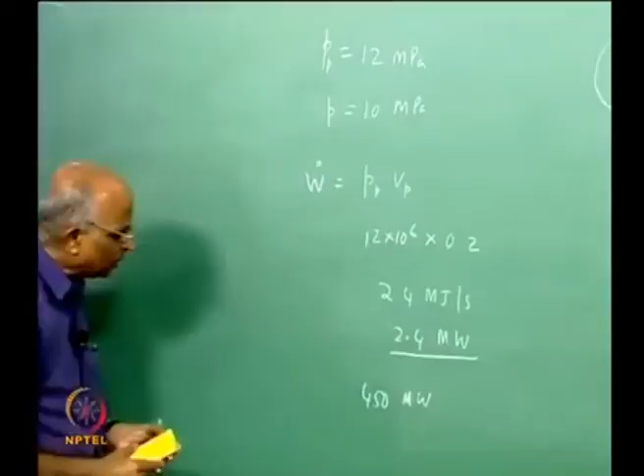Can we have some feel for this number? The power produced in the Ennore plant, which supplies entire electricity to Chennai, is something like 450 megawatt. If we take a super thermal power plant like Ramagundam, it has something like 2400 or 2600 megawatt. That means the power we are talking is enormous.

I cannot have a battery or an electrical power source which is doing it, and therefore what we normally do is we need something like a gas generator which can supply work to a turbine, and using the turbine I drive the pump, and therefore it becomes a pump and a turbine, and it is known as a turbo pump.

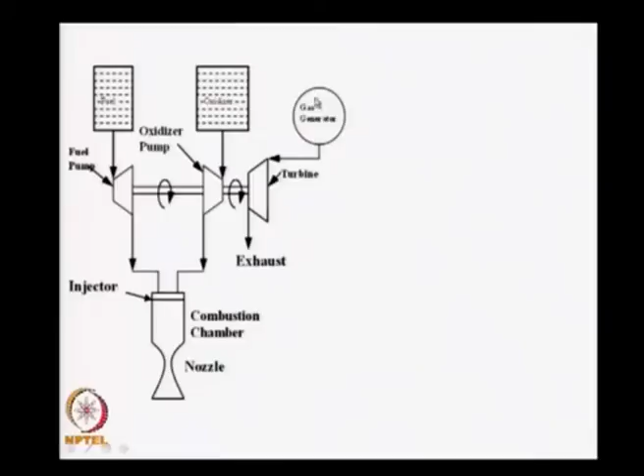I require another gas source. But to have a dedicated gas source is going to be a problem, and therefore what we do is we take the fuel, we take the oxidizer, we pump it, I remove some fuel from the fuel line, I remove some oxidizer from the line, I burn these gases separately, generate hot gases, supply these hot gases into the turbine, generate work which drives the fuel pump and oxidizer pump and supplies it to the chamber, and the exhaust from the turbine is left out. This is an auxiliary nozzle, which means part of the fuel is used in generating high temperature gases, not very high because a turbine cannot take very high temperatures, and therefore you leave it to the ambient, and this becomes what is known as a gas generator cycle.

That means I have a pump which is supplied gas through a gas generator, and such type of a feed system is known as a gas generator cycle for feeding propellants.

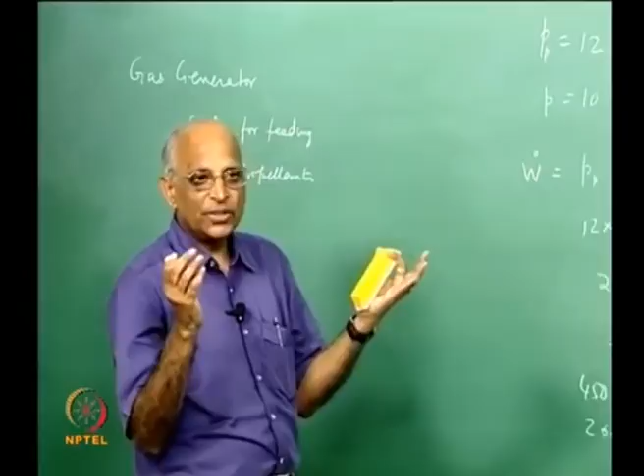I think I will stop here, but all what we did in today's class is we looked at that beetle and said, well, a liquid propellant rocket is quite similar to that. We talked in terms of cold gas pressurization consisting of blow down, regulated, maybe hot gas pressurization, and then found maybe when my duration of the rocket is little large and my thrust is large or my chamber pressure is large, it is just not humanly possible to carry such huge masses of gas which are required. I need a pump, but then we found a pump demands huge amount of energy. I wanted a gas generator, and this is what we call as a gas generator cycle.

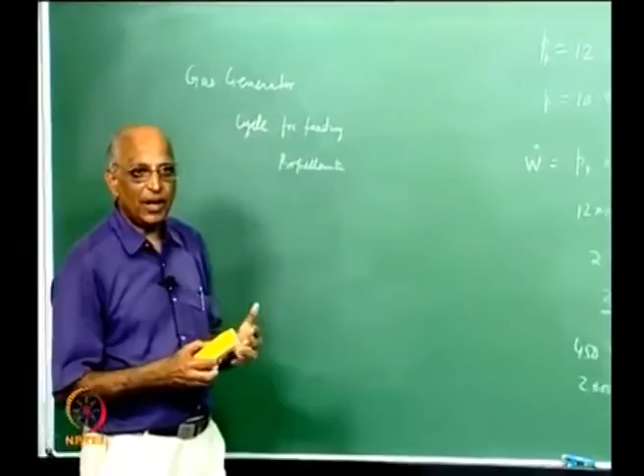In the next class we will advance ourselves, we will see what are the other cycles which we can use and calculate what is the performance of a rocket corresponding to those cycles. And then we will go to the components of a rocket. Well, thank you then, I think that is about it.